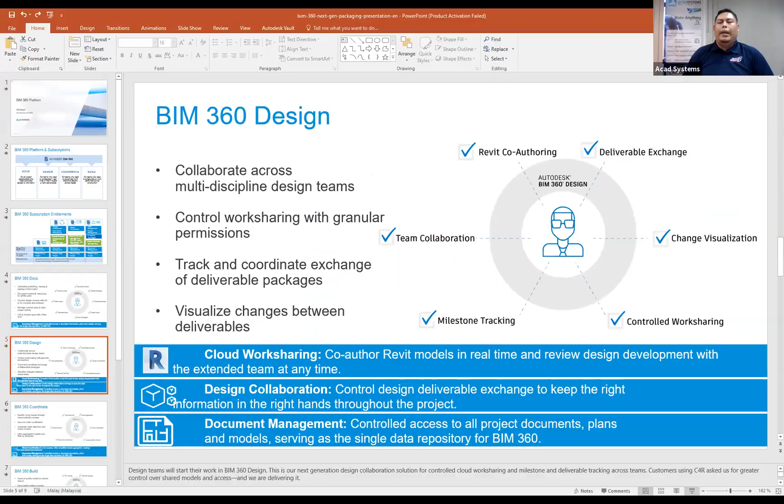Actually, BIM 360 was not really built for Revit solely. In 2020, Autodesk developed the workflows with Civil 3D and Plant 3D as well, so that all three software can be integrated together in one platform.

So what BIM 360 Design can do is help us collaborate. If you want to know more about collaboration, I will have another online learning coming in the next 2 weeks for that topic. BIM 360 Design is actually the right tool for collaboration. Even if you plan to work internally with colleagues, with multiple departments like design, CNS, or if you're a multidisciplinary company working with multidisciplinary models - working with Revit modeling is good, but having collaboration is a plus point for your company.

Collaboration is very important because you don't want anything to be missed out. If you choose to share your models using basic cloud storage, you have the risk of people losing your data or hacking your data, and your data is not safe - it's not guaranteed by the providers. But in BIM 360, it is guaranteed by the providers that the data is highly secure.

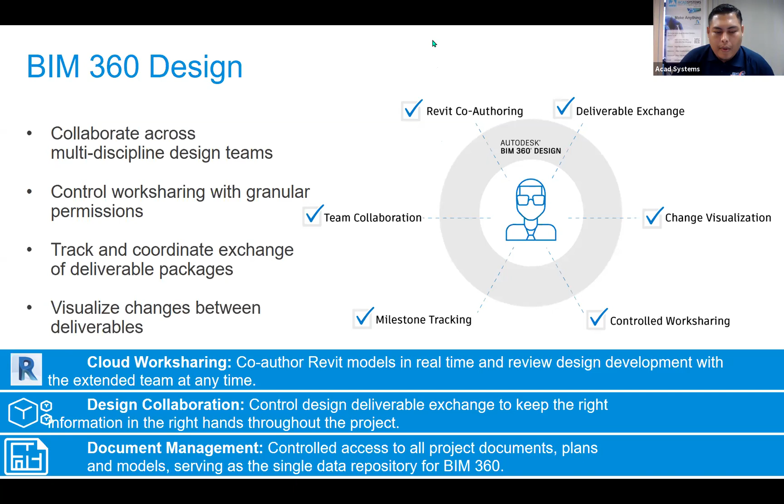So BIM 360 Design works from the web browser. Regardless of your computer specs, even with lower specs, you no longer need to install Revit, AutoCAD, Civil 3D, or Plant 3D to view the models. You can rely on a low spec laptop, just open your web browser, and access BIM 360 Design through it. It's quite convenient, especially for bosses and clients, because purchasing Revit software when you don't really need it is wasted money. BIM 360 comes into the market to make sure it becomes useful for everybody.

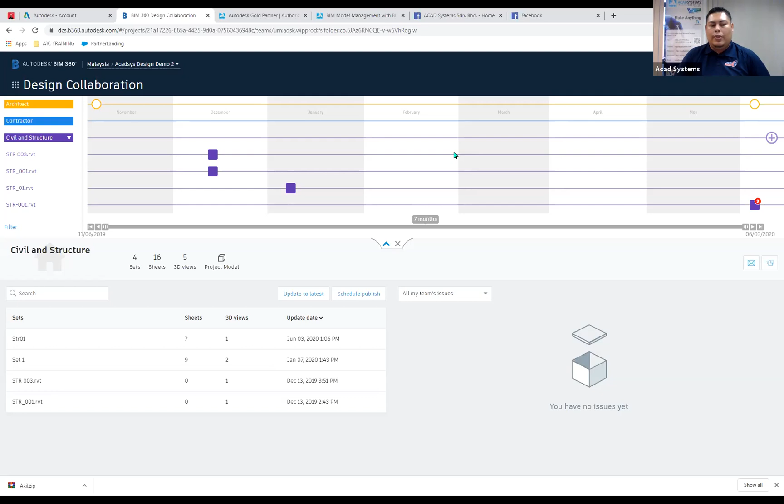The same goes for other teams like CNS. Let's say CNS was last updating since January, and then started to continue the work in June - we know something happened to the team, so you can track the movement of your project progress. By having the milestone tracker, you can see updates in detail. For example, at the bottom you can see the model reviewer.

So you can review the models just by using your iPad, your tablet, or your phone—you can still access and look at the same model. Okay, this is a sample of the structure modeling.

I had conducted previous webinars on the same topic as BIM360 Design. The previous topic covered the overview of BIM360 Design, and today my focus is to show you guys how we can work across the disciplines.

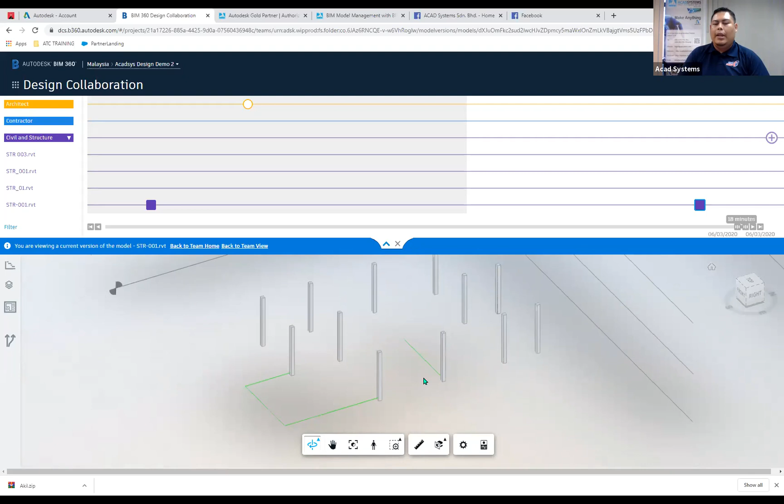For instance, how we can utilize or link the architecture model if you are working as a CNS or M&E team. Previously, without this kind of platform, you would download the models and link them manually from the local hard disk, and then work on it. Today, the entire workflow is totally related to BIM360 Design, where you don't have to download anything, but can straight away load the files from BIM360 Design.

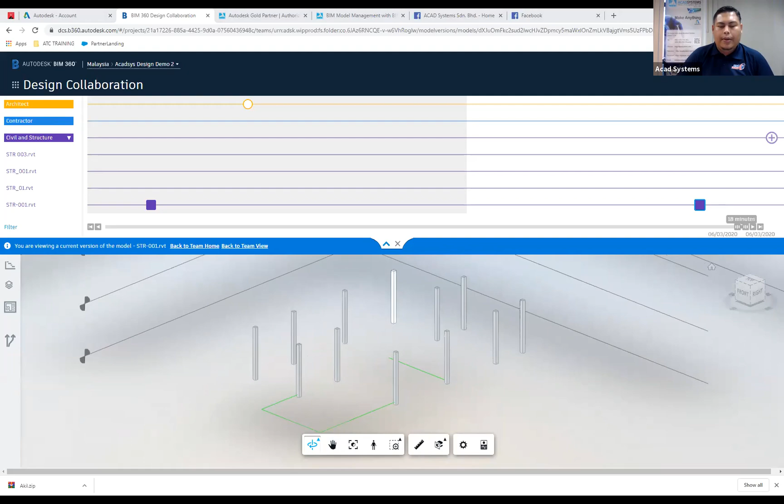Okay, and then let me go back to Autodesk Revit. So this is Autodesk Revit 2019, and currently I'm accessing the models directly from BIM360 Design.

For instance, if I want to view the model, when you start loading the Revit files, you can see there is a BIM360 options menu on the left side, where you can find the data, the folder, and all the drawings and lists are listed here, so that you can simply open up the models.

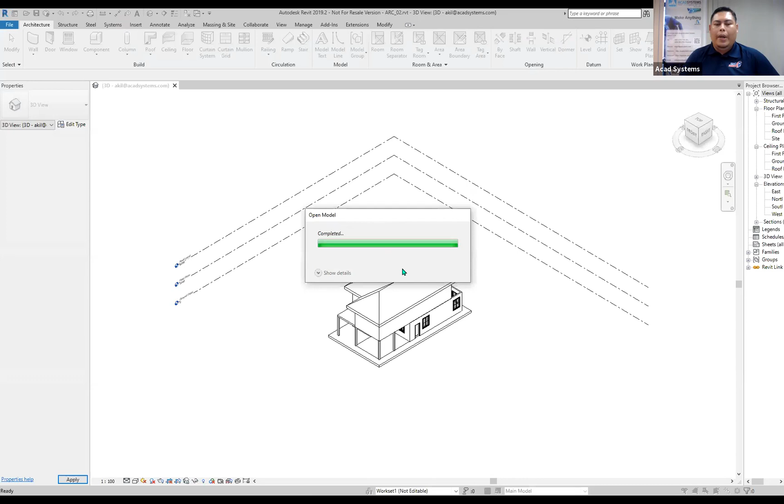So when you open the model and you get this message box, it means you are opening from the BIM360 platform directly. I don't have the models downloaded locally on my PC—you are totally relying on the online platform, BIM360 Design.

So you can access the model, change the model, do whatever you want, and then I have synchronized this. You have to synchronize these models just as you were doing it on your local server. It's the same process, just a different sharing platform.

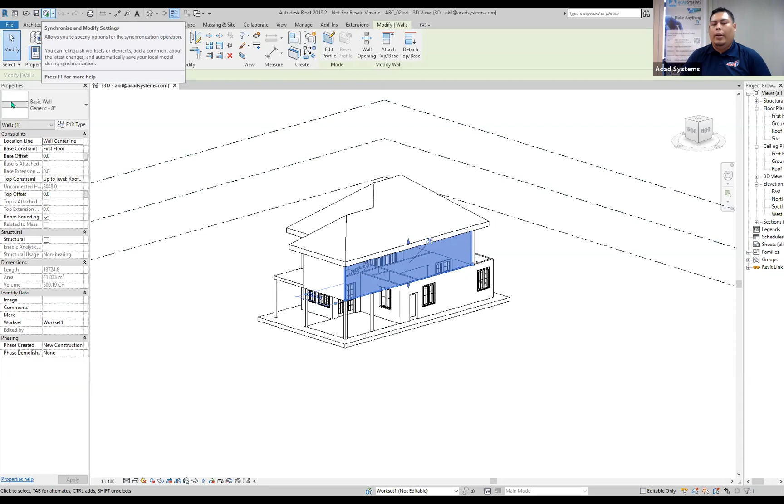So now when I click sharing, synchronize and modify settings, it will upload the recent changes and latest updates in the models, so that the other teams can access the file.

So if you look at the BIM360 Design platform here, we are also having a team that is working with civil and structure. Let's say we are the CNS team that is going to link the architect model so that we can work on the structure.

Today I will show you guys how we're going to set up the file. Let's say I want to work with the structure template from the empty file—or let's say you have your own templates ready.

What you're going to do now is first collaborate your model—you have to save the model. So as usual, let's say I'm creating a central file, calling it the structure model, and let's say create backup one, okay, and save.

What happens next is you create the file, and you have options to choose whether you want to store it locally on your local server—which I won't touch today—or you can straight away create a central file on the BIM360 platform.

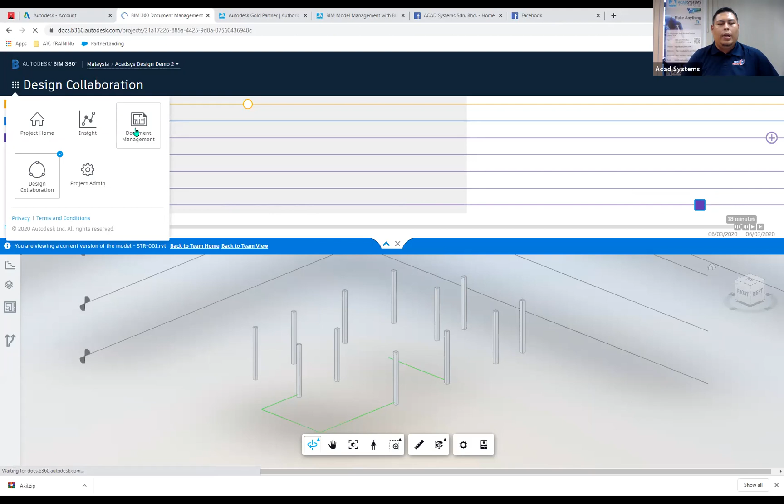Okay, you will see there are no updates yet, because the file is still in processing. So while waiting, let's go to the document management.

And see what has been uploaded from the files. For this project, we have set the teams: architect, CNS, contractor, electrical, mechanical, and other shared folder. Let's look at this folder and see, the model, structure model 001, has been completely uploaded. You will see in this document management feature, we have uploaded at the right time, 2:49 p.m.

So it is real time access. You can access the model real time, meaning that whoever wants to access the model can see the updates starting from 2:49 p.m. If you are changing the models but not updating them into BIM360 document management, people won't get the latest updates from that point.

Let's say I'm going to work with a linking project from BIM360 Design. As you're all aware, I have not downloaded anything. What I will do is go to insert and link Revit as usual. It detects the process that I'm working with the BIM360 platform, and this is where I could find the file. So I will go to the folders.

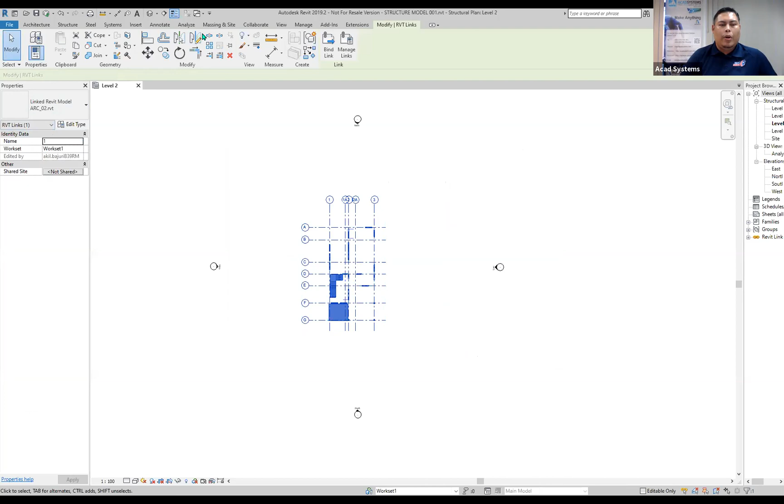Okay, right, so this is the link file. I'm going to pin it. And then, if you're familiar with structural models, you'll see that before we work, you have to recreate your grids and levels. That's the crucial part of Revit, but I won't show those steps for now.

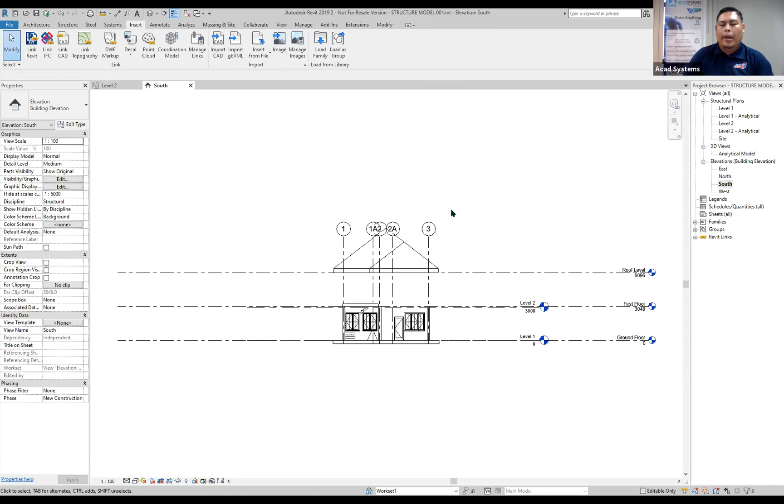So what I'm going to emphasize is how we're going to utilize this existing level, and how we're going to work to add our features, our modeling method. Let's say I'm going to put a few columns. For structure column, I'm going to use these features, but I have to create grids.

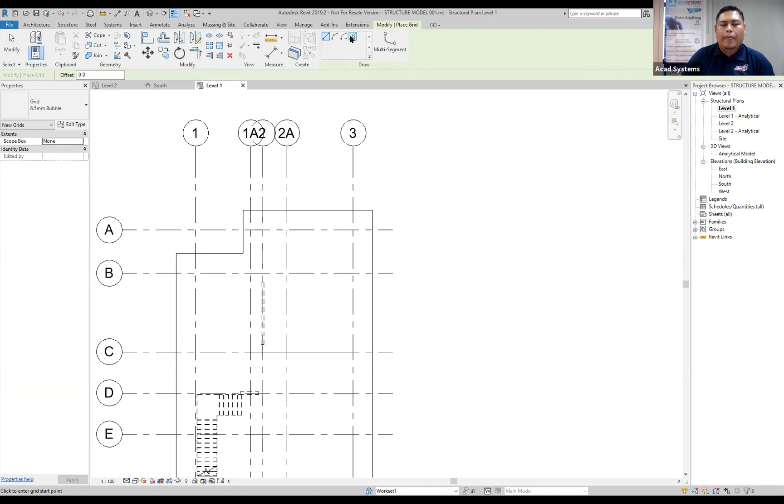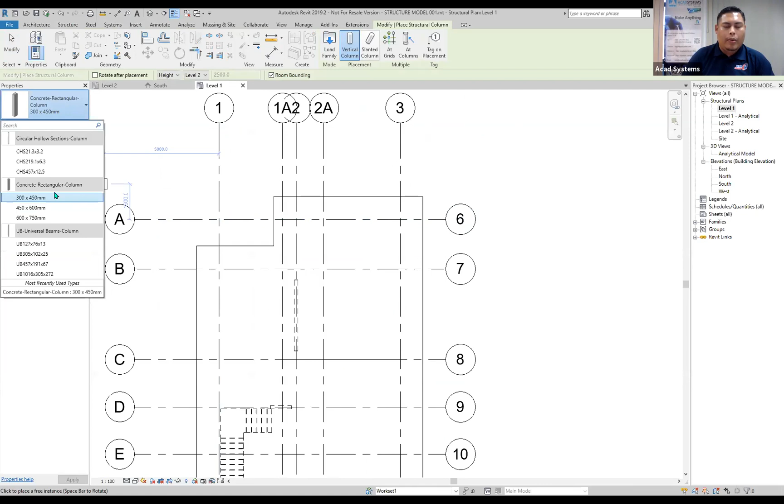Let's say this is the grid line that we are working with. And if you want to work with your column, you can go to structure column as usual. You may have your own setting, so I won't go into that further setting. Let's say I'm locating my column here - it's a big column in the middle - and then a few other columns here to make sure you are getting it.

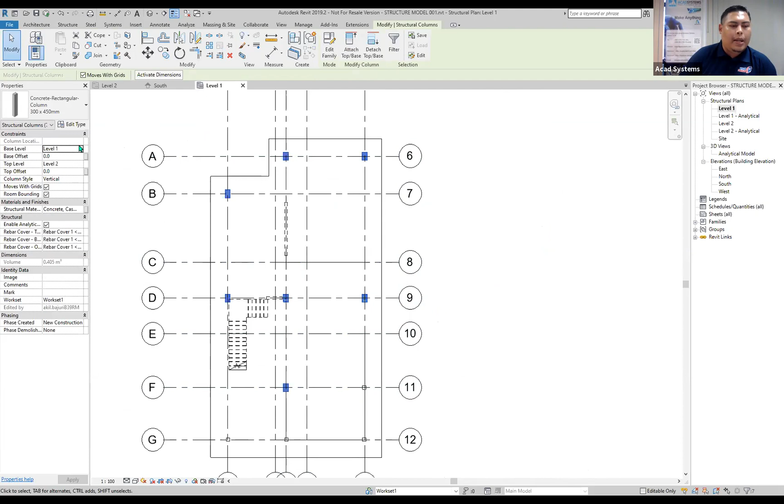By accessing the column, it means that the base level is level 1, level 2. So in 3D view, you will see you have drawn your basic models.

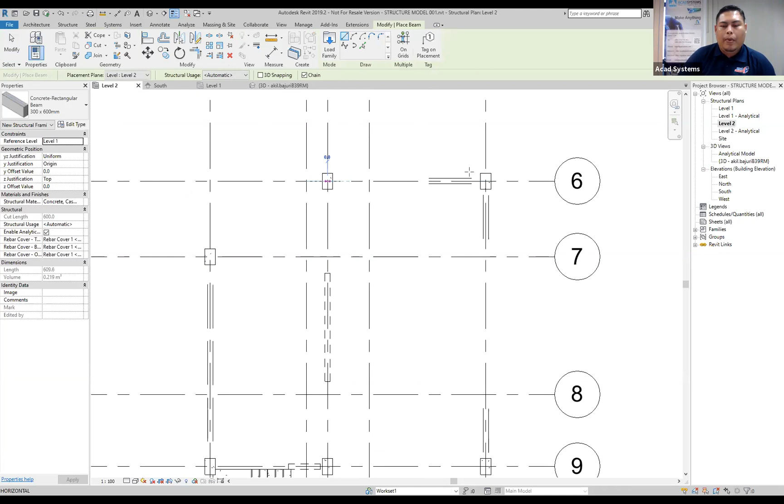And let's say I want to do some building concrete frame, like a beam. So for instance, I'm going to access this. This is only for sample.

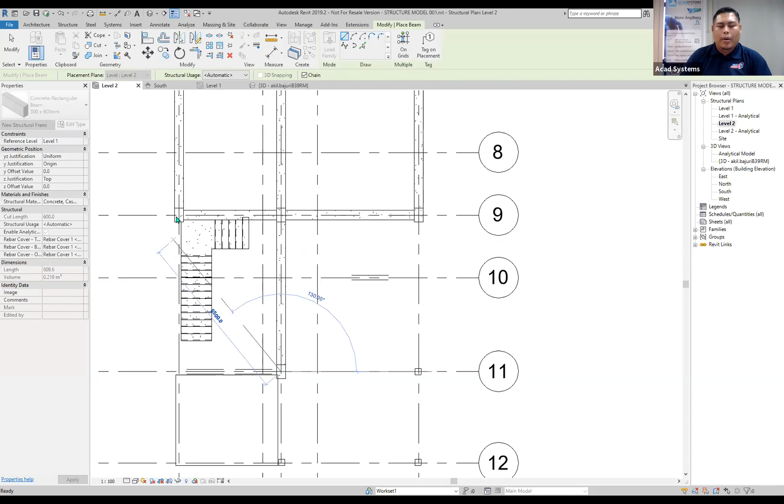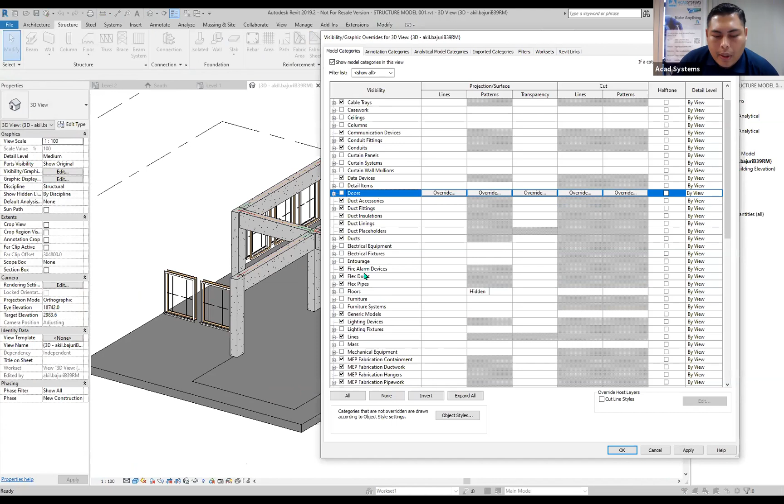Let's say you are working on the framing on the beam, and this is the structure that we are working on. You can hide a few things if you don't want to see them - let's say you don't want to see the floors, or you don't want to see the generic models from the windows.

So this is purely structure models, like common working models, not specific to any template. And if you want to start uploading your files, you go to collaborate and make sure you are setting up the published settings before you decide anything. In this, you have to get the selection sets - let's say this one is the structure model.

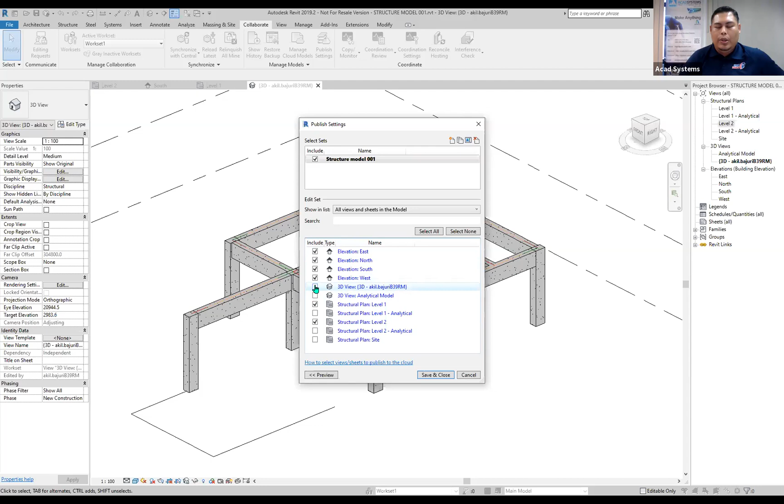Okay, and then you will choose. If you don't choose anything, nothing will appear in the platform. So you have to do the right thing, choose the floor plan, and choose the elevations. And then choose the 3D view as well, and don't forget to save and close.

Okay, and then what happened next is, let's say we just maintain the work sets, and then we synchronize to the BIM360. You just need to click the synchronize. And of course, if you are using the PC to create the central model, it will save the local cache in your local PC as backup, and also upload the model to the BIM360.

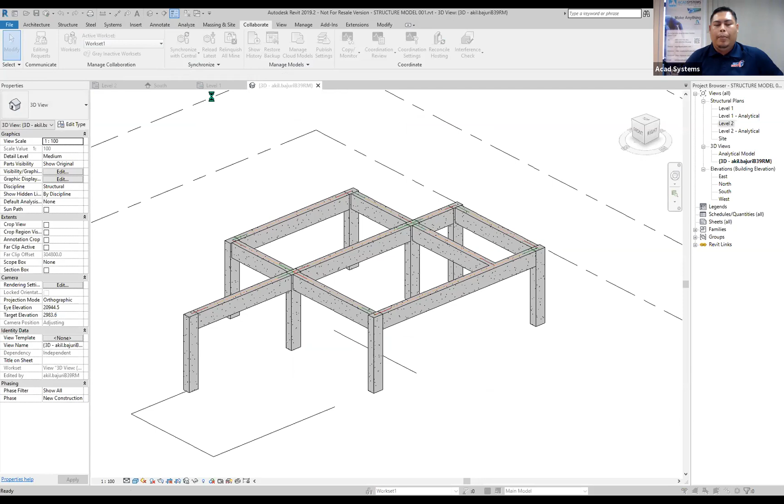It will take some time, and it depends on your internet connections. Hopefully if you're working around KL, you will get good internet connections. And it's not yet uploaded, it is not yet synchronized to BIM360 document management, but for now you will see there are a few things that you need to be concerned about in the managed cloud model settings.

So in this managed cloud model settings, the first method was to set up the publish setting. Now the next step is after you synchronize, you have to go to manage cloud models and define if the model has been published to the latest version in BIM360 Design. And if not, you will see there is a button to publish latest.

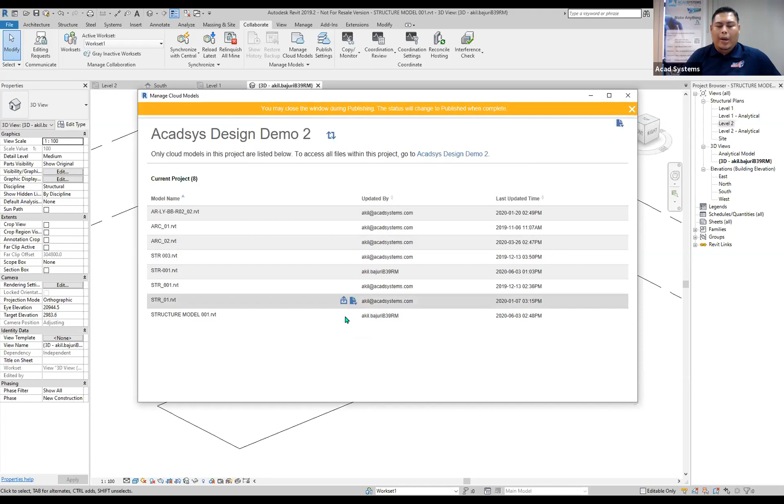Okay, publish the model, and you can close the window during the process and continue your work and so on. So once it's finished, you will see there is an icon saying that it has published the latest version. It may take some time, so hopefully it won't take long for this process.

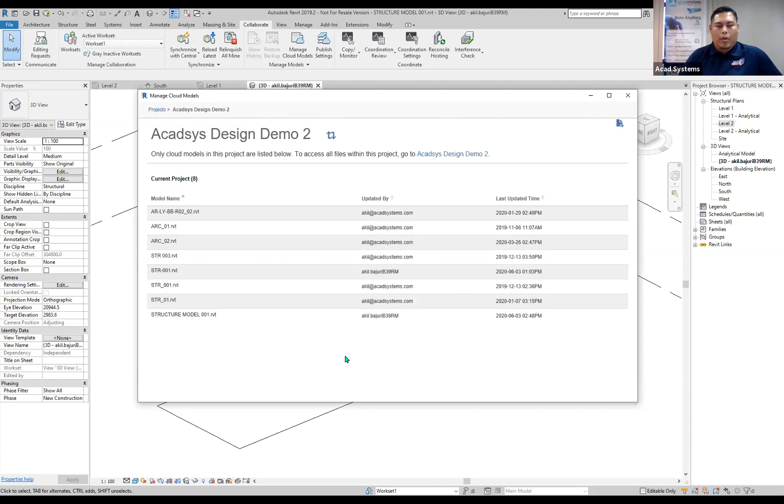Okay, and then right, so you can close it for now, and then we will see in the platform the structure model is processing for now. Let's see, I made the same process earlier, and it produced these models from the same link model.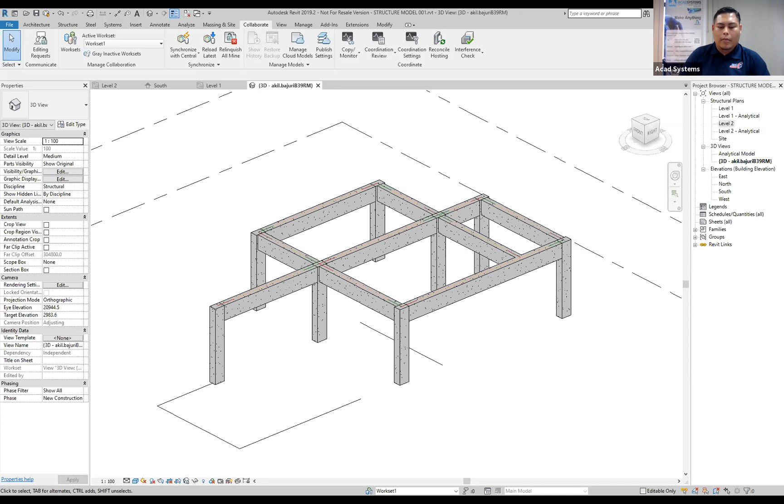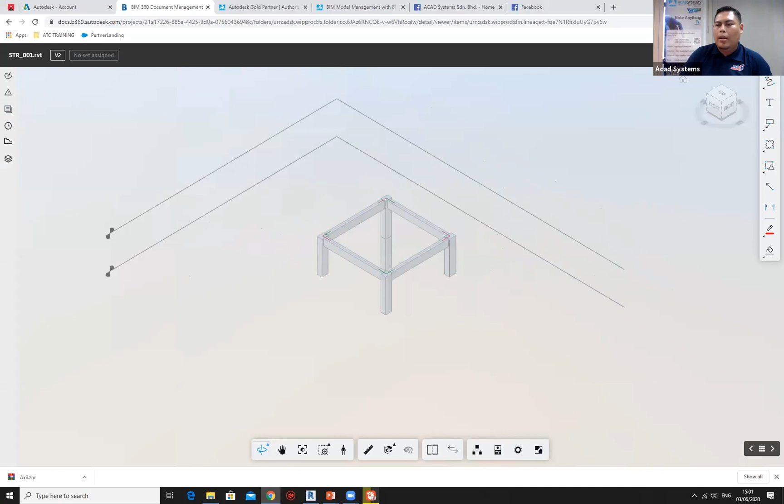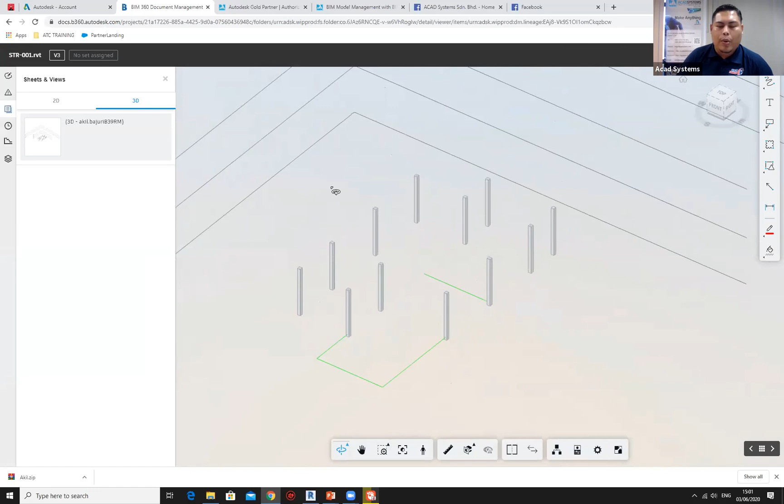So this is the same sample from the same link model. I was creating the columns only, and then you will see we are creating the files directly from BIM360 also. And then you will see if you are logged in as, let's say you are from the C&S team, you can simply log in from the registered account.

And if you look at the options right here, there is a design collaboration tools. I just want to check whether the update has been published. Yes, it has been published completely in BIM360.

So in this particular model, you will see there are new updates here. It shows in the notes—we call it notes here in the timeline, sorry, it's in the swim lane. We call it notes, so that you will see the team has, what are the files that have been updated and published by the team.

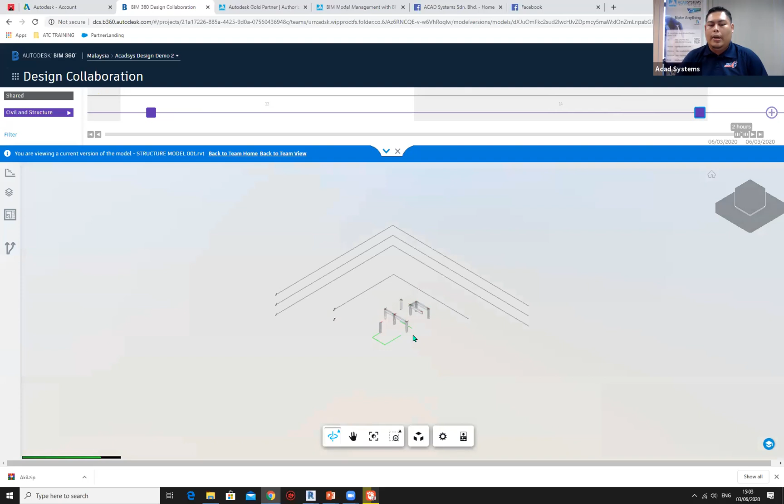So let's say I'm looking at the published models, the recent files that we are looking at. It's processing. So this is purely the structural files that I just created from Revit, and I link the file directly from BIM360 without downloading any files at all. So by looking at this, you will see that there's nothing to stop you from working anywhere you are.

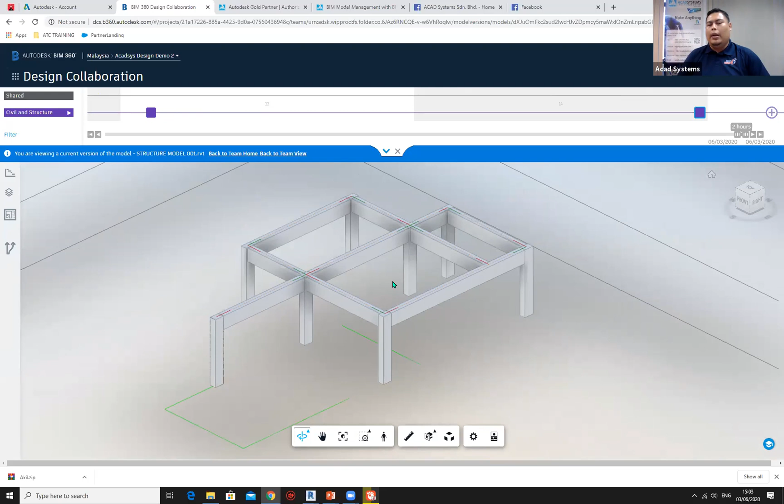And by utilizing BIM360 Design, there are packages that may suit your company. You don't have to purchase 100 seats. You just can get the sufficient seats for your company, and then you can maintain the productivity regardless of where your team is.

I have friends that are still stuck at their kampong village. Because of the CMCO and so on, they have stopped working since the start of MCO, and that is not good for your company where you need your projects running and you need your staff continue working anywhere they are. So this process comes in very handy for every user.

You don't have to know—it's not really hard to learn, even though you don't have any background. And if you never touched Revit, it's okay, it's not a hard process. If you are the bosses, it's good to know that you can still continue. And the most important thing is you don't have to upgrade your server every 5 years, every 10 years.

So from this point, let Autodesk handle your server on the cloud, so that you just need to focus on the project. This is mostly like the way we work across disciplines, and how important it is to understand the swim lane—we call it the milestone tracker. If you have any questions, you can drop the question in our chat box here.

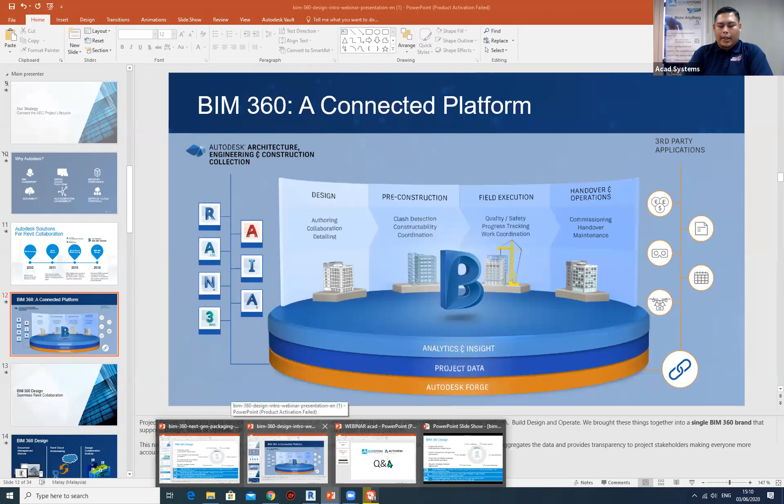So if I may share the other slides, I'm showing this - if you look at this slideshow, you will see there are 4 available packages for the ASEAN region, especially for Malaysia. By understanding this, the one I just showed you guys is the BIM Design package, and the design package utilizes the collaboration features for your design team.

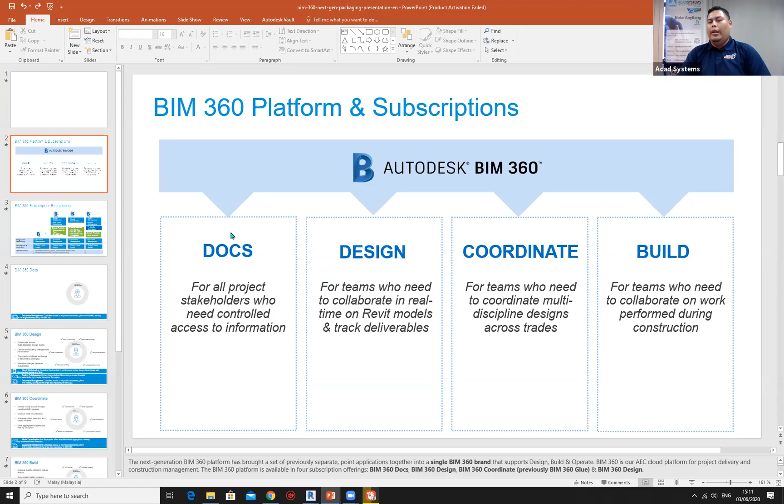Meanwhile, Coordinate, or what it was known as Glue - as you mentioned in the question, it was known as Glue, the new name is Coordinate - is actually to make sure you can coordinate the models just like you are doing it in Navisworks. Let me show you some features on Coordinate.

Okay, so what BIM360 Glue, or the new name Coordinate, can do: firstly, it can run clash detections using the cloud platform. You can control versions and see model aggregations, and then you can review the models and define the trade coordination process.

There are a few limitations compared to Navisworks because this platform is purely on cloud. This means if your contractor accesses this file, it's good because they will have the latest updates in real time. So the contractor will know the clash points on the spot, and you will see the reports in BIM 360 Coordinate or BIM 360 Glue. That is the difference between Design and Glue.

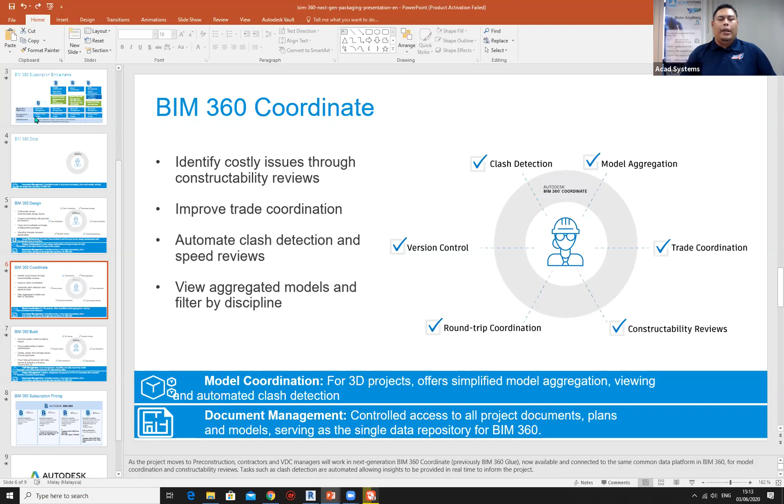Meanwhile, all the data, whether you're working with Design or Coordinate, will be stored in BIM 360 Document Management. That's how it works. So as for data storage, all the data will be uploaded into Document Management, BIM 360 Docs.

For example, if you subscribe for 25 users of Design, you will get another 25 users to use BIM 360 Docs, so those users can access Docs as well. That is how BIM 360 plans work.